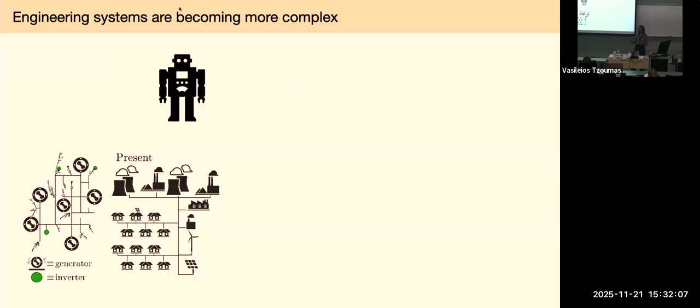So what is motivating me to study this? So I'd argue that engineering systems today are becoming increasingly complex, and I think we can all agree on that. Some examples: we're seeing robotic systems move from rigid systems to more flexible systems with more degrees of freedom, perhaps more actuation, more sensing. Another relevant example is the power network, which we're seeing become increasingly complex as we move from synchronous generators to inverter-based resources. So our future power network will have these green nodes that represent inverter-based resources or renewables.

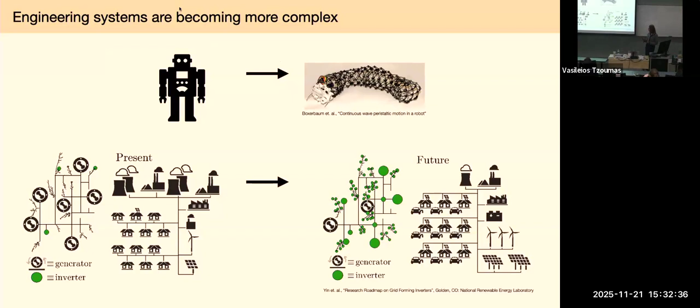And as these engineering systems become more complex, we see new opportunities arise for both control of these systems and design of these systems. Some aspects of these new systems I'd like to highlight is multiple timescales arise. I've mentioned already that we see increased sensing and actuation in these systems. And as we see more parameters or more flexibility, we have more opportunities for design. So we have a larger design space that we can work within.

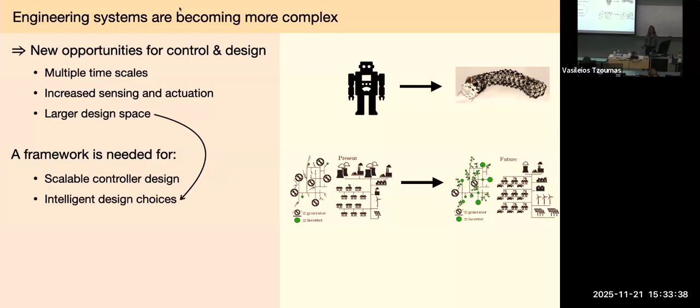And within this context, I claim that a framework is really needed for a few things. First, for scalable controller design. So if I have really immense sensing and immense actuation, if I want to implement a controller in real time, I need to make sure that my controller scales as the amount of sensors and amount of actuators increase. And if my design space becomes larger and larger, I need to have a framework to make intelligent design choices, right? It's less obvious how to do these designs ad hoc as I have more knobs that I can tune.

And just to dive a little bit deeper into this framework that I think is needed, for scalable controller design choices, here I'm highlighting a controller that contains two blocks, one gain representing a state estimator and one gain representing a state feedback controller. And I'll go into this block diagram in more detail later in the talk. But my claim is that for this controller to be scalable, I really need these gains or these matrices to be represented by sparse matrices, so that I can compute this matrix vector computation in a parallel manner over distributed computing units.

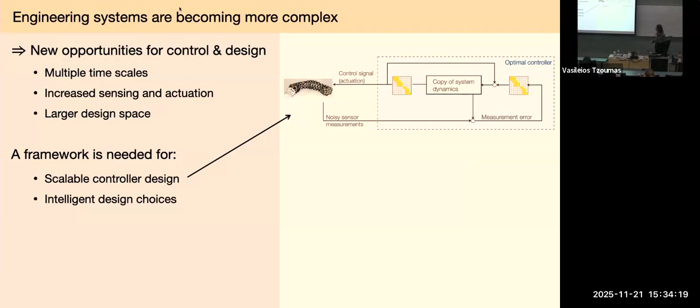And for intelligent design choices, I'll bring up kind of a classical example. So perhaps you've heard of this before in the context of co-design. It's much easier to steer a bicycle with the handlebars up front where they are. If I were to move the steering to the back of the bike, no matter how good I am as a cyclist, I will do worse, right? So this kind of idea that how I design my system limits how good my controller can be.

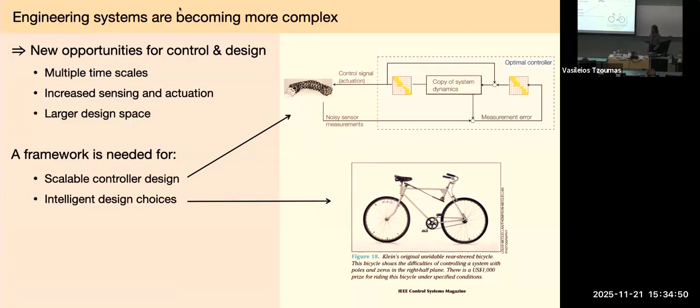Okay, so that's the framework I'm going to be talking about today. And like I said, I'm going to go for more breadth than depth. So part one of this talk, I'll discuss how we can link system design choices to controller design through a collection of different case studies. And I think this highlights the diversity of this approach. So I'll look at the impacts of incorporating grid forming resources into wide area control design for power networks. I'll look at design and control trade-offs for a soft-bodied robot. And then I'll talk more theoretically about LQG control of the wave equation.

In part two, I'll talk about challenges in scalable controller design and some recent advancements that my group has made there. Okay, so let's start with part one, really looking at this question of how does design of my system impact my achievable control?

And I'll start with the first case study on the impact of incorporating grid forming resources into our power networks. And with all of this work, I really want to thank my students and my collaborators who've done a large portion of the work that I'll present today.

Okay, so I mentioned at the beginning of this talk that moving forward, we anticipate our power network changing in terms of its topology and its dynamics. So in the past, everything has been driven by these large synchronous generators, these massive power plants. Moving forward, though, as we incorporate more and more renewable sources of energy, be that wind or solar, all of these resources are connected to our grid through inverters. And our future power networks will have larger and larger shares of these.

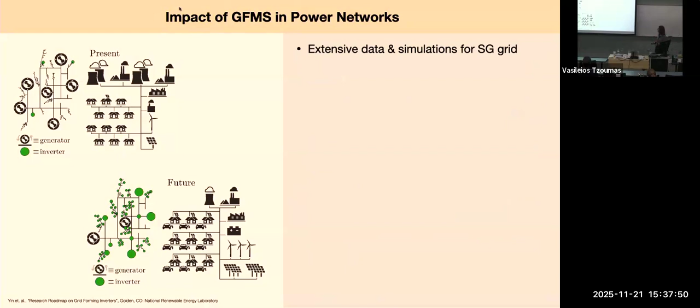So why is this a challenge? We have extensive data and simulations already for synchronous generator dominated grids. That's what exists today. So we have all of this data about how they're working. We have really intensive models to understand these systems. But we lack understanding of how grids dominated by grid forming resources will behave. These don't exist yet, so we can't just study them heuristically. And models that are simple and easy to understand are really lacking.

An additional challenge of incorporating more grid forming resources into our power network is that these grid forming resources introduce additional measurement signals and additional forms for potential actuation. So rather than having one synchronous generator, I guess we can zoom in like one of these nodes, I'm replacing one synchronous generator with a whole cluster of grid forming resources. And with that replacement, I'm incorporating many, many more measurements I might need to track to get an accurate understanding of where my system is.

And why this is challenging is because if I want my control policy, my wide area controller, to sense what's going on in my network and actuate in real time, I now have much more data I need to process in real time. And as that amount of data grows, I run into an issue of, can I do this quickly enough? I really need this to be distributed for that to be possible.

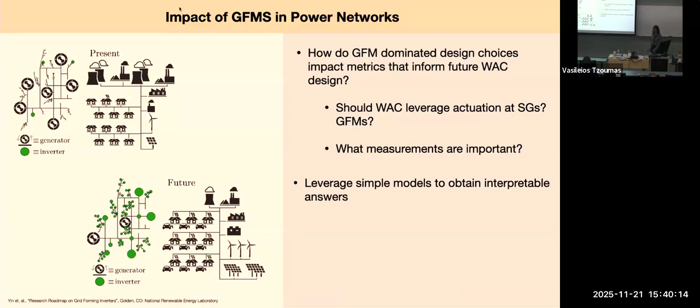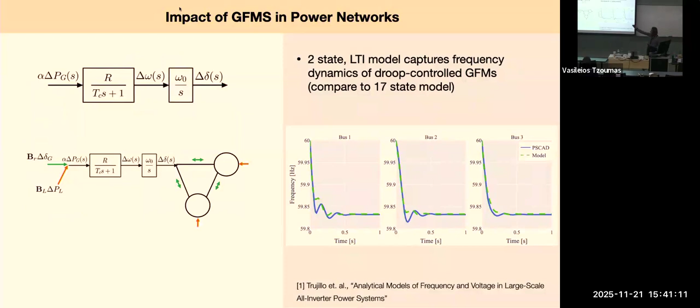And again, this hints to this question of, now that we have these very novel dynamics, how can we use this information to more intelligently design wide area controllers? There's a lot of ways we could approach this question. We're examining this from a number of metrics. I'm going to just highlight one of those today, but happy to chat about others offline. And this is a metric of controllability.

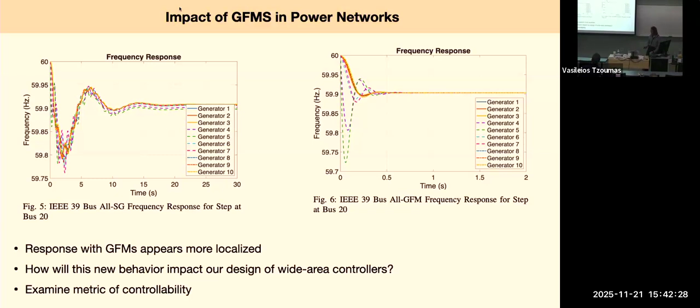So what I'll demonstrate is that we can select the parameters that describe our grid forming resources to determine the required control effort of a wide area controller. So to start, I'm going to begin with a very simple setting. I'm going to consider a network with just 3 nodes, each of which is a grid forming resource, all of which are identical, and the coupling between these 3 nodes is also identical. You can view this network as a Kron reduction of an idealized IEEE 9 bus network, where the effective admittance in each line is a constant number B.

A few more parameters are in my model. R of my grid forming resource represents the grid forming droop coefficient. I likely can't control this very much because my droop coefficient ensures equal power sharing among the network, so I don't really want to mess with this. Likewise, my effective admittance B is determined by my network structure. This is pretty fixed. I can change something though. I can change this parameter TC, which shows up in my block diagram. And this represents a time constant of the grid forming resource's power measurement filter. And I can kind of select this to be what I want it to be.

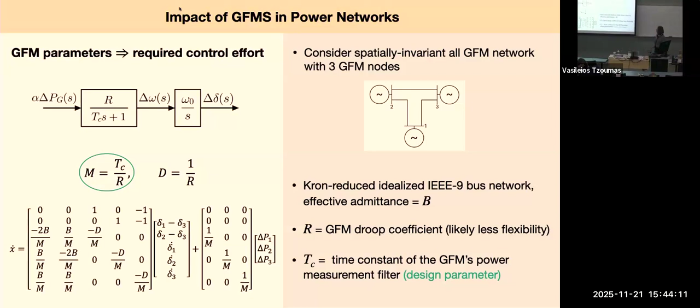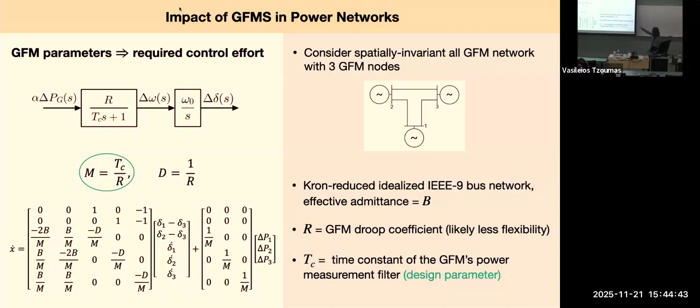Okay, and I can view the ratio of TC to R as something like an inertia in a synchronous generator. And I can view the ratio 1 over R as something like a damping in a typical synchronous generator. If I write out the state space model for this 3-node network in terms of a state, which includes deviation in angles at each of my nodes, and deviation of frequency from my desired 60 Hertz at each of these nodes, I have a linear model x dot is equal to Ax plus Bu, where u is my power change that I'm controlling. And we see that my A and B matrices depend on the parameters B, M, which I can control, and D.

So what's interesting is that for this system, I can analytically compute the eigenvalues of my controllability Gramian. And these eigenvalues are determined by these parameters. Recall that we said that M is really the only parameter that I'm able to tune to whatever I want. And this shows up in one of my eigenvalues with multiplicity 3.

And just as a reminder what the controllability Gramian is, I can visualize its impact by drawing an ellipsoid. The axes of this ellipsoid are the eigenvectors of my controllability Gramian, and the length of those axes are the corresponding square root of the eigenvalues. And everything in this ellipsoid depicts a point in my state space that I can control to the origin with energy 1. Right, so it's telling me how easy or difficult different directions in my state space are to drive to the origin. So what I'm seeing is that a larger eigenvalue represents a direction that's easier to drive to the origin with less effort. And thus, if I can choose M to be smaller, I'll require less control effort to move in that direction.

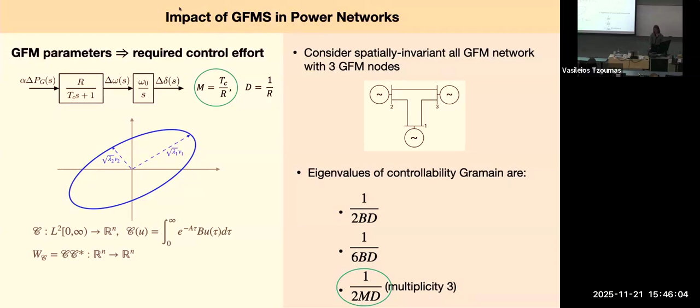Of course, that's a really simple example. I only have 3 nodes. Power networks are huge. So let's make things slightly more complex. I'm going to move up to a network of n grid-forming resources, but I'm going to keep things spatially invariant. So everything's in a ring, and all of the grid-forming resources are identical, and all the couplings are identical. Don't worry, we'll get more complicated soon. But again, I can solve for the eigenvalues of the controllability Gramian analytically. And they take the same form as for the 3 node case. So again, only one of these depends on my effective inertia M, which is the parameter that I can control.

And interestingly, one of them now depends on the size of my network. Okay. And if we examine the corresponding eigenvectors of these eigenvalues, we see that the first 2 eigenvalues correspond to eigenvectors that only modify relative angles, whereas my eigenvalue that depends on my effective inertia that I can tune and has multiplicity n, where n is the number of nodes in the network, corresponds to eigenvectors that move along frequency directions. So what I'm saying is it's easier for me to modify frequencies, or requires less control effort, if I make m smaller, and thus make this ratio larger.

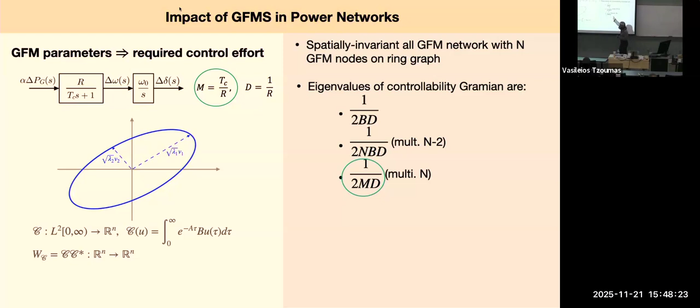And what I'm plotting here is, oops, I'm just gonna show this again. So I'm plotting the eigenvalue that depends on my effective inertia on the top. And remember that eigenvalue has multiplicity depending on my network size. So there's many of these eigenvalues, but they're actually all just right on top of each other. And I see that the value of this eigenvalue scales with my effective inertia. Okay. In contrast, all of my eigenvalues that correspond to eigenvectors that don't align with frequency directions in my state space are independent of my effective inertia. So this trend holds for more complex systems as well.

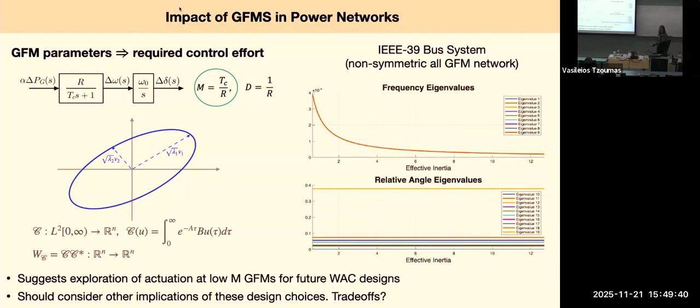Oh, I did want to say something. So my claim is this kind of suggests that we should explore how to actuate at grid forming resources when we design wide area controllers in the future. And in particular, we should choose our local grid forming strategies to have potentially low values of effective inertia to make wide area control more effective. Of course, we should consider other implications of these design choices. Typically, we don't gain something good for free. So we're currently trying to see what trade-offs might exist in this space.

Okay, I'm gonna take it one step further and look at a heterogeneous network. So everything I've been looking at so far assumes that every single node in the network has been replaced with a grid forming resource. Here, I'm assuming that I keep some synchronous generators. So within my IEEE 39 bus system, I replaced 3 of my generators with grid forming resources. And thus I reform my dynamics. So I have a new dynamical system. X dot is AX plus BU, where my A and B matrices have changed because I now have heterogeneous dynamics that correspond to both synchronous generators and grid forming resources. And I think about modifying my B matrix so that I can actuate either at only synchronous generator nodes, only grid forming resource nodes, or both.

And then I compute the corresponding eigenvalues of my controllability Gramian. And what's quite surprising is that I don't notice very much difference in magnitude of my eigenvalues between full actuation at every node, versus actuation only at my grid forming resources. In contrast, if I only actuate at my synchronous generators, my eigenvalues are much smaller. So we see that most of our controllability comes from our grid forming resources.

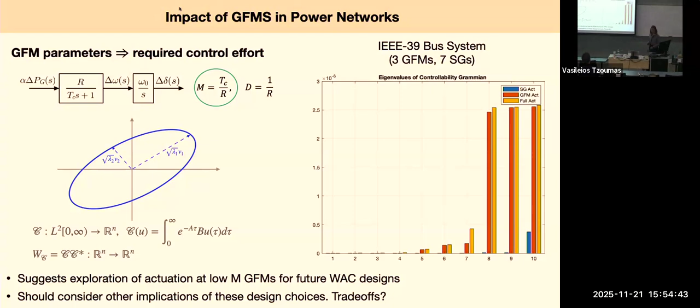Okay, moving on, just to kind of drive home my point that we can design systems to impact resulting controllers, I'm going to look at a second case study. So this looks at system design and control trade-offs for a soft-bodied robot. My student Andy did most of this work, but I also collaborated with Professor Cody Scarborough, who did his PhD here. So wanted to give a shout out to him.

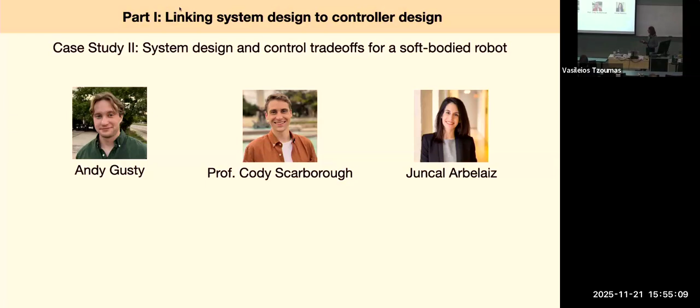Okay, so here we're looking at a model of a soft-bodied robot, so kind of like a worm that's inching along. And we're modeling the dynamics as a nonlinear wave equation where my nonlinearity comes from my friction force, which is a function of my du/dt. And we're modeling this nonlinearity by this asymmetric curve. So the red curve is symmetric, and we're shifting the curve up by a parameter NF to obtain the blue curve that models our friction.

And the reason for this asymmetry is that I want preferential direction of movement of my crawler. So if friction was symmetric, my crawler would just kind of contract and expand and never move, right? I need asymmetric friction to kind of preferentially drag one way or the other.

Okay, so I'm going to focus in on two parameters here, NF, the asymmetry in my friction force, which I can assume is kind of dictated by design. So I'm going to design the body of the crawler to have this preferential direction of motion. So perhaps in the design process, I can change NF. And then rho is the density of my crawler. So perhaps I can change this as well. And I don't fabricate these robots, but it does seem like there are pretty efficient methods for fabrication. So perhaps not so crazy to think that we have some flexibility in designing these parameters.

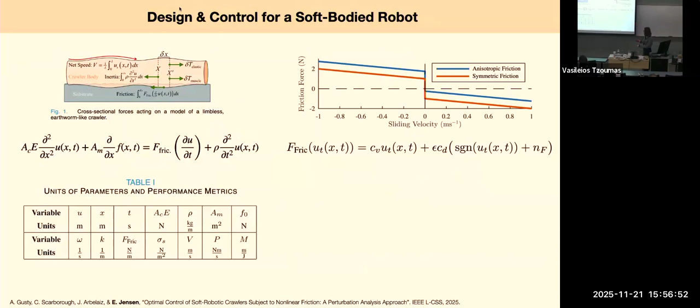Okay, so what we did here is, so this is a nonlinear wave equation. The friction force is non-smooth and asymmetric. So it seems maybe like we can't get an analytic solution to this, but we actually got something quite close. So we used perturbation analysis and leveraged multiple timescales in the system to obtain an analytical solution to a reduced order model that seems to pretty accurately capture the full dynamics.

So blue is the analytical solution to our reduced order model, and red is a numerical solution to the full dynamics. So we can see a little bit of mismatch, but overall our analytical solution does quite well. And why the analytical solution is nice is because it points to parameters that we can leverage for design, right? I want to understand how parameters are affecting my design choices and affecting my control. And I can't do that as well with just a numerical solution.

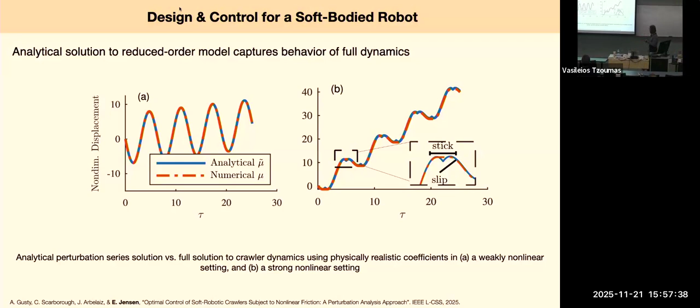Okay, so leveraging that analytical solution to the dynamics of my system, we're able to obtain a maximal attainable velocity of my crawler. So the maximal attainable velocity of my crawler, V star, I'm saying approximate because this is according to my analytical solution, but of course we've seen that's very close to my true solution. And this depends on my parameters that I think I can design, NF and rho.

This parameter CD here is just rho times my gravitational constant. And so I can see that by effectively selecting these parameters, I can modify the achievable velocity of my system. And now how this ties into control design, I'm going to highlight here a trade-off. So what we see is that increasing my velocity doesn't come for free.

So my control policy depends on three things: frequency of oscillation, a wave number of oscillation, and a forcing strength. So the three horizontal axes determine the three choices in my controller. And I'm plotting here the corresponding velocity of my crawler, mileage, how far I can go, and stress, like how much stress I'm putting by contraction and expansion.

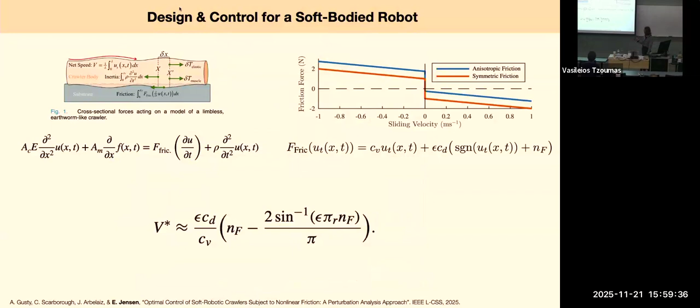And so what I see is that actually velocity and mileage, there's a complete trade-off, right? So if I increase my velocity, I actually decrease my mileage. So this is kind of highlighting like, okay, I can choose these parameters to get a higher potential velocity, but then when I hit that higher velocity, I move less far with the same amount of energy. So this is mileage for a given energy.

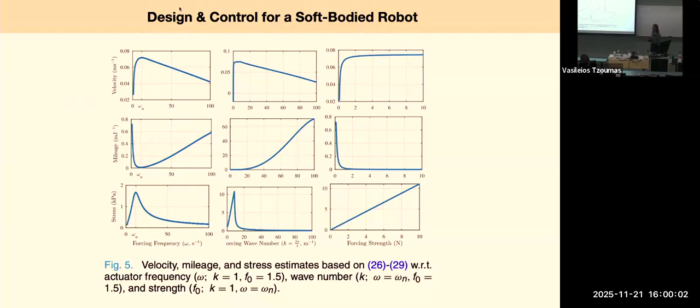And so I think this again highlights this idea that we can look at control and design of a system together to make choices based on what we want to achieve. Do we really want to achieve maximal velocity, even if it's at the expense of mileage, or should I explore this trade-off space more generally? Okay, any questions there before I move on to my next case study?

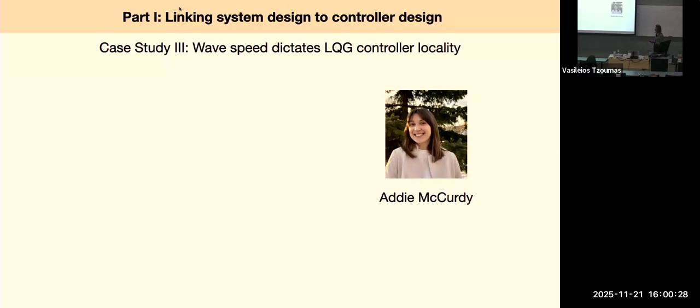Okay, so this is a little bit more theoretical. So here we're really focusing on how design decisions affect the structure of optimal controllers. We're going to focus here on the wave equation and examine how the wave speed dictates the locality of an LQG controller. So really the bigger picture question I'm asking here is, do system parameter selections impact the locality of an optimal controller?

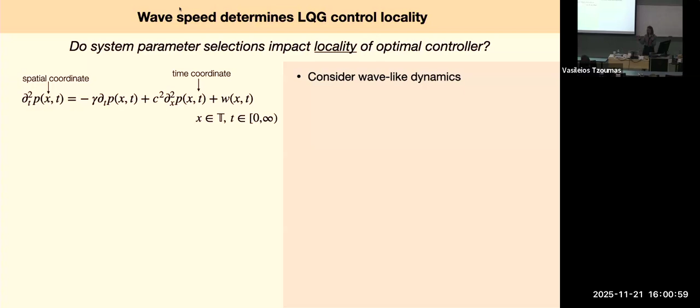So we're going to consider wave-like dynamics. So here's my wave equation, which depends on both a spatial coordinate and a temporal coordinate now. I'm going to assume continuous time, infinite horizon, and I'm going to assume that my dynamics are evolving on an interval with periodic boundary conditions. My parameters here are my damping and my wave speed.

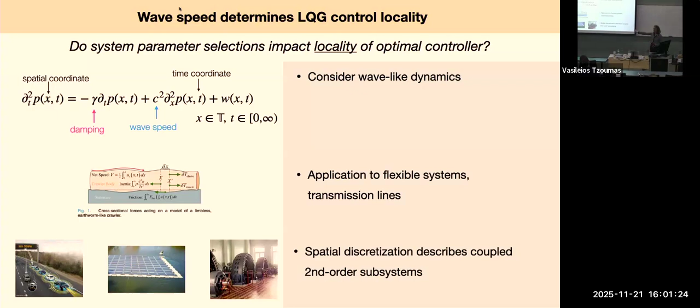Applications of a damped wave equation are vast, but include the soft-bodied crawler that we just saw, transmission lines, and many more. And spatial discretizations of the wave equation describe coupled second-order system dynamics like a vehicular platoon or synchronous generators in a power network. Okay, so we can think about many different control policies here. I'm just going to view classical LQG control.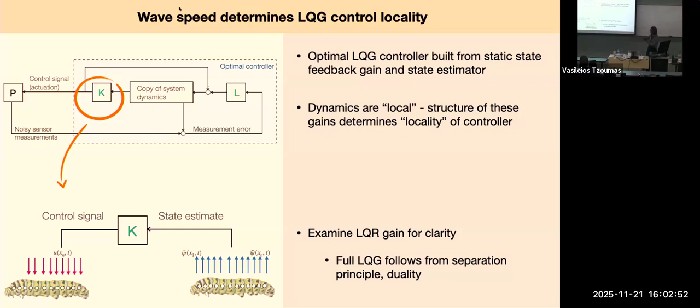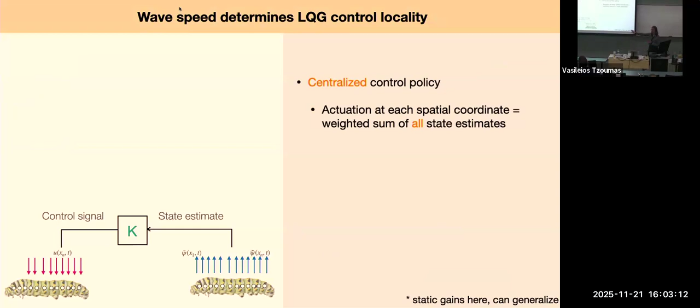Okay, so if I just zoom in on the gain K, I can view this as mapping my state estimate to my control signal. So a vector of state estimates to a vector of control signals. And I can think about what it means for this controller to have a certain degree of locality. So let's think about three different cases. The least local case corresponds to a centralized control policy when actuation at each of my spatial coordinates depends on a weighted sum of all of my state estimates.

So this looks like a full matrix, right? So to compute all of my control signals based on my state estimates, I multiply my state estimates by a matrix which probably has no zero entries. Okay, in the full continuum setting, if I'm not discretizing things, I'm assuming I can actuate continuously and estimate continuously. This matrix vector multiplication becomes an integral, right? I'm integrating against every single point on the body of this crawler to actuate along every single point in this continuous domain.

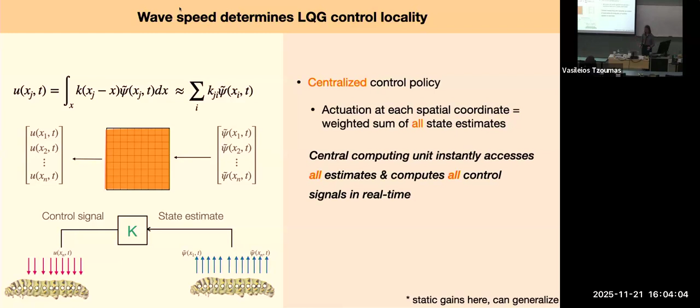Okay, so here I'm assuming I have one central computing unit that instantly accesses all my state estimates and computes all my control signals in real time. Contrast this to kind of the complete opposite, a decentralized control policy, in which actuation at a given spatial site depends only on the state estimate at that exact site. So what this looks like is my actuation at spatial location x sub j is just a constant number k_j multiplied by my state estimate at the same spatial site x sub j.

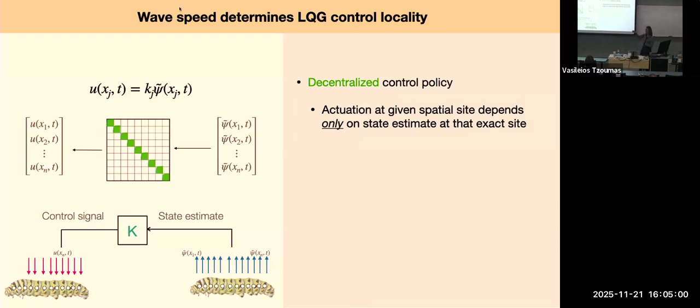If I look at this over a vector of different spatial sites, this looks like a diagonal matrix. So I apply my diagonal matrix, multiply it to my vector of state estimates to obtain my vector of actuation signals. And clearly I can see that I can compute each of these actuation signals at a different computing unit, right? I could compute each row of this matrix vector multiplication at a different computing unit in parallel if I wanted to. So this is purely local. I'm only using my own information to compute my own actuation signal.

We can think about something in between, which I'll refer to as localized, and say that my actuation at a given spatial site depends on a local subset of state estimates. So this looks like multiplication by a sparse matrix, not diagonal, but not full. And again, if I'm approximating everything with a continuum, this looks like an integration where my bounds of integration are over some compact region around my point of interest. Okay, and again, in this case, I can distribute my computations across multiple computing units, each doing some portion of this matrix vector multiplication.

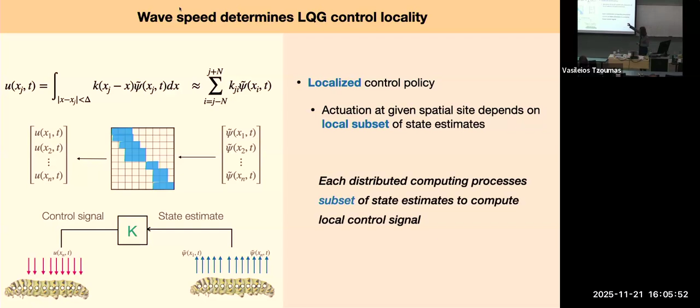Okay, so now that we've discussed what locality is, the question is, how do the parameters of my system affect the locality of my controller? Remember, my parameters are my damping and my wave speed. So the first thing I'm going to do is technical math here, but don't worry, I think you'll still get the end result even if you want to ignore the math. I'm going to formulate this for those who are interested as an abstract differential equation.

So I'm going to write this to look like x dot is Ax plus Bu. But remember, my state here is really a function over my domain, my interval, right? So my state is actually infinite dimensional. But I can write this to look like x dot equals Ax plus Bu, and I'm going to use extensions of finite dimensional linear systems analysis. Okay, and just as in finite dimensional linear systems, there's something like a matrix exponential e to the At, which tells me how I evolve from an initial condition to a state t steps future in time.

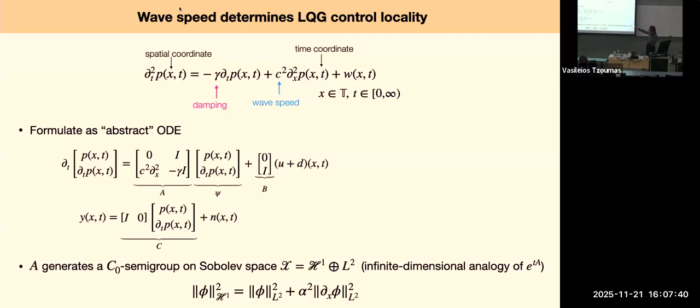Rather than a matrix exponential, this is now something called a C0 semigroup, which is generated over a Sobolev space. And this Sobolev space has a norm which is equal to the L2 norm of my second component. My first component is weighted according to its L2 norm or energy, and then the energy of its spatial derivative. So I can kind of think of this as weighting a kinetic energy of my second component and a potential energy in my first component.

Okay. So with this framework, I'm able to rigorously formulate the LQR problem in infinite dimensions. So this looks just like my standard LQR problem, which is x transpose Qx, right? Now this x transpose Qx is just replaced with an inner product over my Sobolev space. And similarly, I still have my control energy weighted by this parameter R and subject to my dynamics. Okay, so I kind of wanted that to highlight the R and not the plus, but highlighting the parameters that we can modify. I can modify R, the weight on my control effort. Q, I'm thinking of as the weight on my kinetic energy. And then alpha down here, I'm thinking of as the weight on my potential energy.

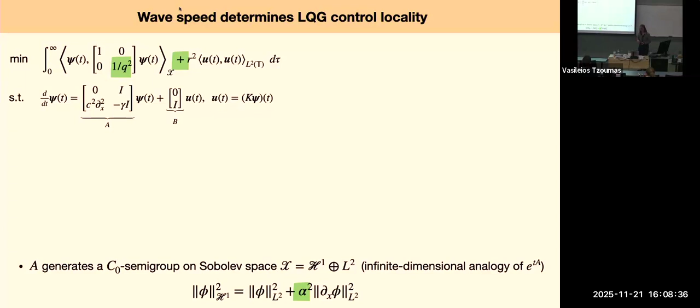Okay. And all of my pictures talked about decentralization in terms of a diagonal matrix. Here, everything is continuous. So what I mean by completely decentralized is that I'm convolving my state estimates with a kernel that's described by a Dirac delta distribution, right? So I'm just convolving my state estimates with a delta in space.

So really my actuation signal at a given site depends only on my state estimate at that site. So what I'm saying is I actually gain nothing from looking to my neighbor. The best I can do is just use my own local information. So essentially we can tune our system by selecting our wave speed C appropriately. For the crawler, you could think about this as tuning the elasticity of the material.

Interestingly, decentralization is completely independent of my damping. The result also holds if instead of having periodic boundary conditions, I implement homogeneous Neumann boundary conditions. And like I said, the extension to full LQG follows just from separation principle and duality.

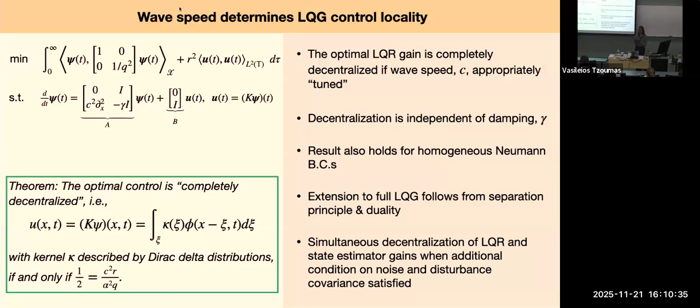So I think this is very interesting and non-intuitive that for certain values of wave speed, my optimal LQR controller tells me only care about what's happening right here. Don't care about what's happening even sort of to the left or right of you. And that's quite unintuitive. So I just want to briefly discuss the tools we used in the proof.

So first we simplified our computations by non-dimensionalizing everything. Then we leveraged a theorem by Curtain and Zwart that tells us the optimal LQR control policy, just like in finite dimensions, can be obtained by solving a Riccati equation. Now this Riccati equation is operator valued rather than matrix valued. And we leveraged Fourier analysis to get an analytic solution.

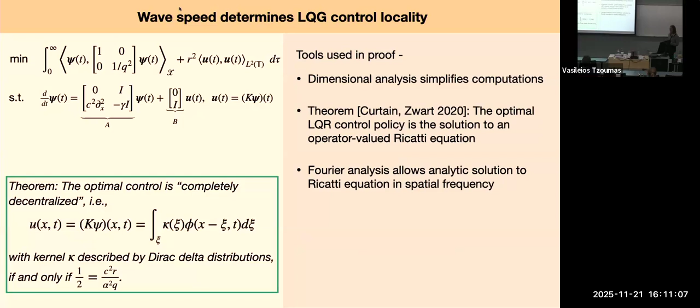Okay, so let's dive deeper because of course this should raise some concerns. The first question would be, well, how robust is this result? So what happens when this exact wave speed is not selected? You would hope that if your wave speed is close to this, your controller would still be close to decentralized, right? Because you can't pick a number exactly.

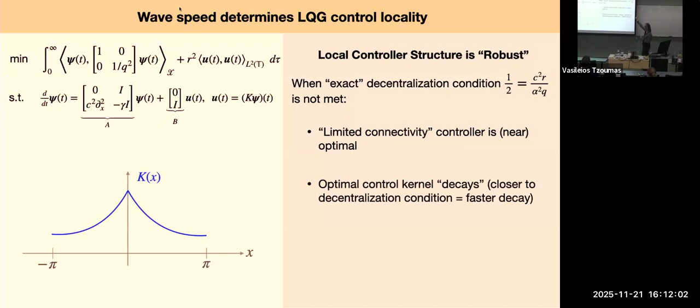Okay, so what we see here is that if I perturb my wave speed slightly, the controller that's optimal still has what I'll call limited connectivity. So what I mean by that is we can see that the optimal control kernel, so I'm going to convolve this with my state estimate at any time, this decays. So I have this exponential decay, and it decays more rapidly if I'm closer to my optimal wave speed.

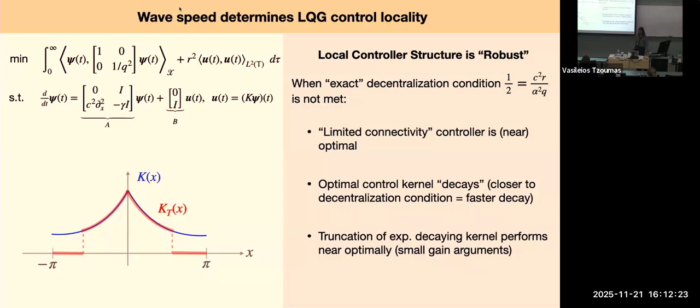And using small gain arguments, we can show that truncating this gain doesn't degrade performance too much. So I can kind of truncate as much as I want, get really, really close to something completely decentralized and still do okay. And this extends to discretized dynamics.

So you might say, okay, well, in practice, everything is discrete. I agree. So let's discretize our dynamics. This is the discretized wave equation, where this bold-faced letter D represents a discretization of the derivative operator, so a matrix of 2s and -1s.

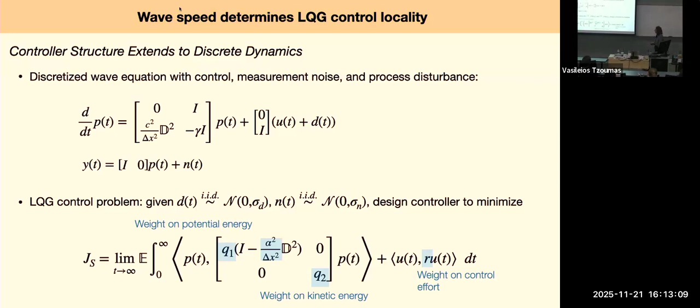If we look at the LQG problem here, assuming some covariance of my noise and disturbance, and design a controller to minimize this LQG objective, where notice here R is the weight of my control effort. This is my Q matrix and my LQR cost. So weights here include a weight on potential energy, again, kinetic energy and control effort.

Again, we see that for certain parameter choices, the matrices in my optimal LQG controller are actually diagonal gains. Right, so I didn't impose any constraints. I just solved the Riccati equations and my matrices turned out to be diagonal. And so again, quite surprising that if I just choose my wave speed the right way, my optimal controller is completely decentralized. I don't do better by sharing information.

Why is that, with a capital W? Why? Great question. I think we don't know is the short answer. So if anyone wants to help me gain intuition. Maybe can I ask a maybe relevant question?

Mm-hmm. Right? So if you have the full decentralization, is the actual performance in terms of tracking good? I'm thinking in terms of mobile robotics always, you have your quadrotor and a reference trajectory. I want to track this trajectory. So now I have full decentralization. Can I actually do good tracking, or did I pick the parameters in a way that ruins my tracking, and these matrices become diagonal, but at the end my performance is not good anymore?

Yeah, so that's a totally valid question. The question is basically, do I not share information because I'm going to do terribly no matter what? Don't even try. So of course we looked at that.

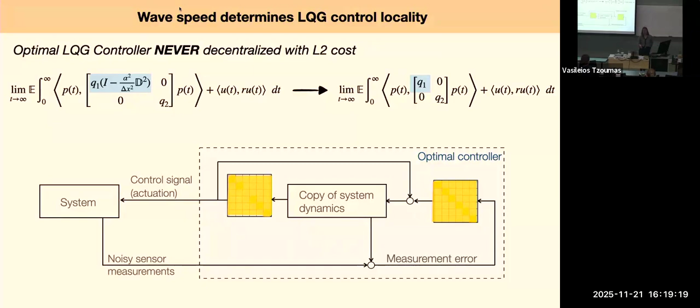Yeah. So what conditions on the initial state, matrices like A and B, give you this bound, like it's optimal when the K is diagonal? So for initial condition, if I'm understanding your question correctly, the cost depends on my initial condition, but the optimal gains are independent of initial condition for the discrete setting. For the continuum setting, I do have to ensure that my initial condition is in the domain of my operator. So it's weakly differentiable and stays in L2. Is that your question? Yeah.

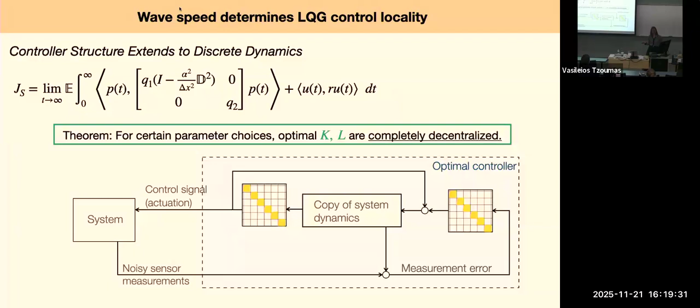Other questions before I move on?

Okay. So I talked a lot about design. And I think a realistic criticism is, okay, well, as a controls engineer, you probably aren't designing all these systems. You're probably given a system and asked to design a controller. So the second part is just to briefly tell you that I do think about that question too.

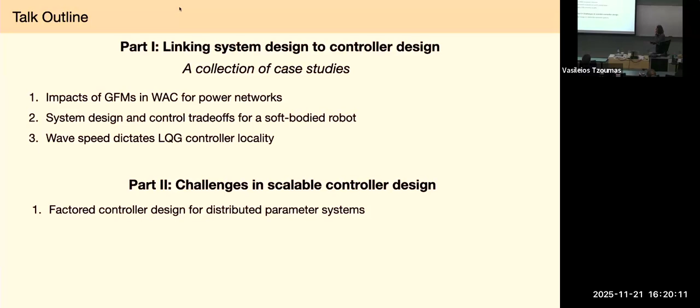And I think there's a lot of challenges in designing controllers scalably when we're given a really large scale system. And I'm going to just briefly touch on some of the current work I'm doing on this in my group. Okay, so to talk about this, I first need to generalize my definition of a local controller. Everything I've talked about has been in terms of static matrices, right? I've just talked about a matrix as being diagonal, sparse, or full.

But let's think about what happens for a general dynamic controller. Okay, for a static controller, its sparsity structure I can think of by just looking at how each actuation signal depends on each measurement in the network, right? So here I'm looking at these drones. This is a topology, or some graph structure, that interconnects a local subcontroller at each drone.

And so my actuation at drone 2 can only depend on the measurements that it can access according to this graph, right? I feel like this doesn't match my picture. Oh yeah, it does. Okay. So it can access measurements 1, 2, and 3, right? 1, 2, and 3 are connected, and it can't access measurements 4 and 5, so those gains have to be 0. And I can fill in and look at how each actuation signal must look. It can't depend on measurements it doesn't have access to. And I can condense this all into a sparse matrix that represents my controller gain.

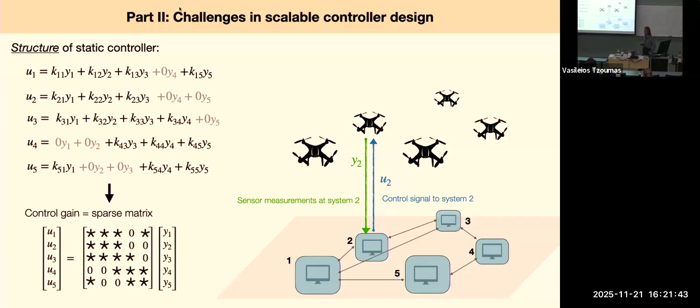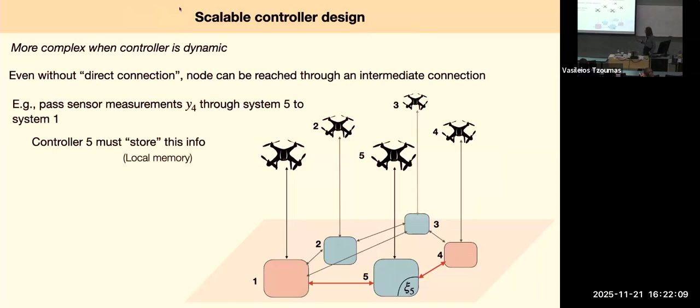Okay, let's make this slightly more complex though, and think about dynamics. So even without a direct connection in this graph topology, a node might be able to be reached indirectly through an intermediate connection. So for instance, nodes 1 and 4 aren't connected, but perhaps node 1 could gain information about node 4 if node 5 shares that. That requires node 5 to locally store this information in its state. And what this looks like now is a dynamic controller. So my controller has its own state space realization, and the matrices that describe this state space realization have a sparsity pattern.

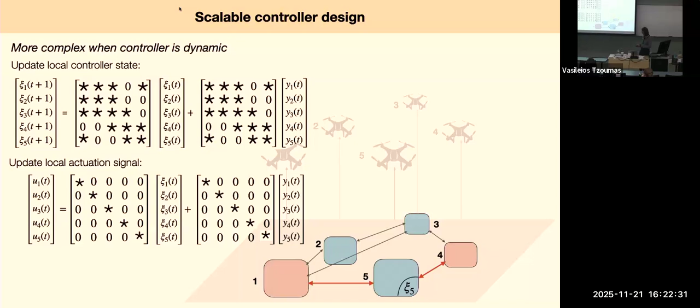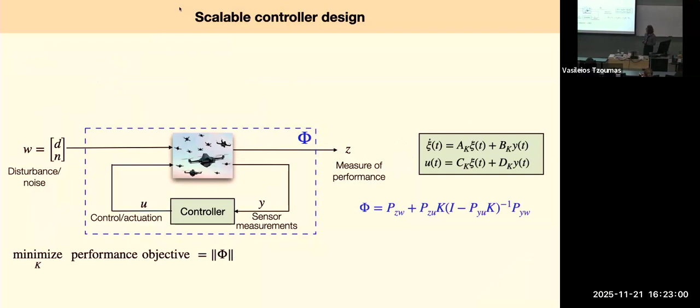Okay. So now we've talked about locality in this more complex setting. Let's look at the resulting controller design problem. So this is my standard framework for robust and optimal control. I have some exogenous disturbance or noise coming in and some measure of performance I want to optimize. I can write the closed loop map from disturbance to measure of performance in terms of my plant and my controller. And remember, my controller I can realize with some state space realization. And my goal is to minimize some measure of this performance objective.

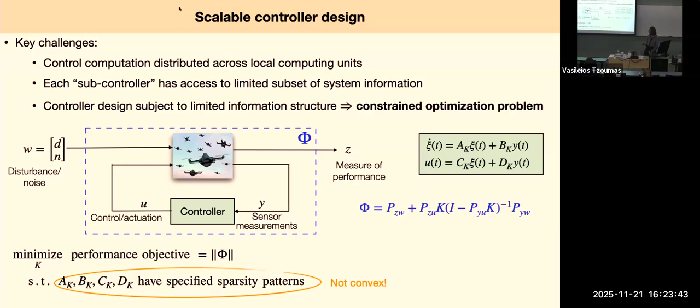Key challenges here are that my control computation must be distributed across these local computing units, each of which has access to a limited subset of system information. And this leads to a constrained optimization problem. So rather than just minimizing this objective, I need to constrain the matrices in my state space realization of my controller to have some sparsity pattern. And this becomes quite complex because my map from disturbance to performance measure is already non-convex in K, and now I'm adding this really complex constraint. So I have a non-convex optimization problem. This leads to one of the key challenges for scalable controller design.

So a lot of existing work has leveraged convex restrictions of this problem using clever factorizations of the controller. So for instance, if I can write my controller as the product of M, a dynamical system, and N inverse, where N is also a dynamical system, I can implement my controller via this block diagram, where G is another arbitrary dynamical system. One specific example of a convex restriction like this is system level synthesis, which I know folks here are working on.

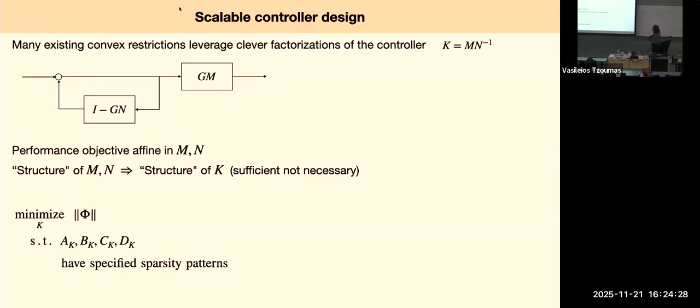And the nice thing about this is that if I choose these factorizations in a clever way, such that my performance objective is actually affine in these factors, and the structure of M and N implies the structure of my controller K, then I essentially have a convex restriction of this problem. So that's really nice. And recently my group has been looking at extending this to PDE dynamics. I'm going to rush through this because I'm out of time.

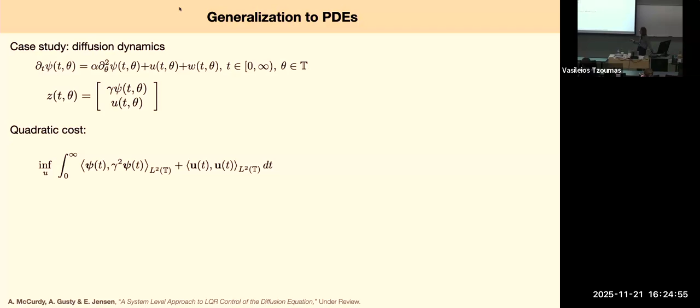But we specifically looked at the diffusion equation or heat equation and looked at a quadratic cost. And our theorem shows that this same factorization approach does hold for PDE dynamics. I'll just acknowledge that similar work has recently come out of Caltech where they looked at discretizations of PDEs over finite time horizons. The difference here is that we didn't make those assumptions. We're looking at the full PDE over an infinite time horizon. So essentially I can do the same convex restriction: break my controller up into these two blocks, design both of these independently, and recover a structured controller.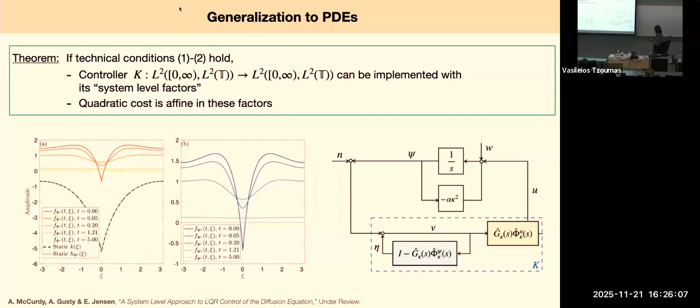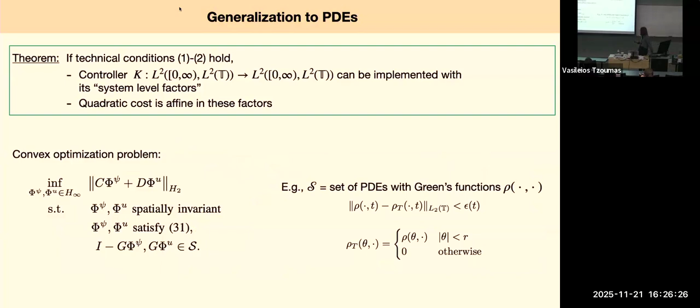And what's great is we can now get an equivalent convex optimization problem. This is a restriction of the problem I might want to solve. And we can think about different constraint sets that characterize locality of my controller, even in this infinite dimensional setting. I kind of rushed through that because I'm out of time, but we do have a paper on arXiv and I'm happy to chat offline.